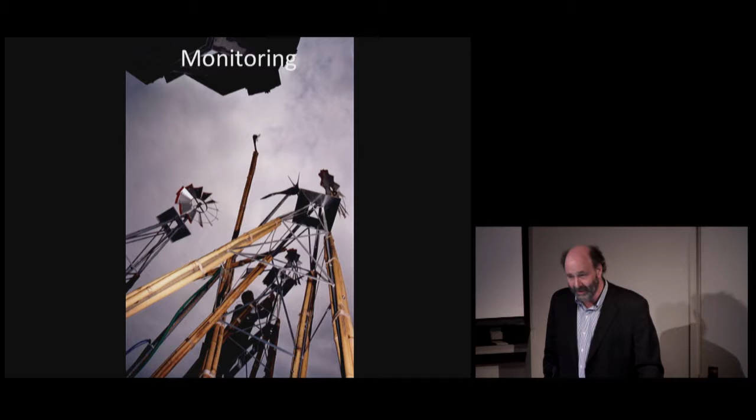So in those first 20 years, we were always fascinated by this series of complexities, whether it's high-tech, low-tech, technical innovation, and at the same time, yes, those are my dad's bamboo poles that I borrowed as we built this monitoring system in front of the Canadian Centre for Architecture about 15 years ago to try and somehow bring the outside inside and the inside outside. And we work in this integrated process on a constant basis, and many of the people around the table are not architects, and that makes our work really rich.

Our social activist roots really come from the community. There's a lot of women, semi-retired, semi-working, who donated a hell of a lot of time during some of the most critical moments of the history of Benny Farm 20 years ago. And they really taught us how to be activists and how to be effective in our activist activities. The government was going to destroy a real strong, rich community because a bunch of bean counters had an idea that demolition and reconstruction was fine and economically better.

So it was a 20-year battle, which is not tonight's lecture, but it's in the book, and you'll be able to download a copy of the book off the internet. I'll show you the website in a second, so anybody can read about this story. The story deals with everything from the embodied energy, the human scale, how to renovate, add, the importance of common spaces, and how to slide them into projects even when they don't exist in our budgets.

Trying to find a way to bring a whole wide eclectic variety of clients together, from single mothers who are still teenagers and going back to school, and they should be in the heart of these communities and not in some segregated parts of the city. And how can this density also really hold on to the values of green spaces within the city? How can we look at embodied energy as an opportunity? It's rare that we get to do wood flooring in affordable housing, and this is one of the techniques on how to get that done.

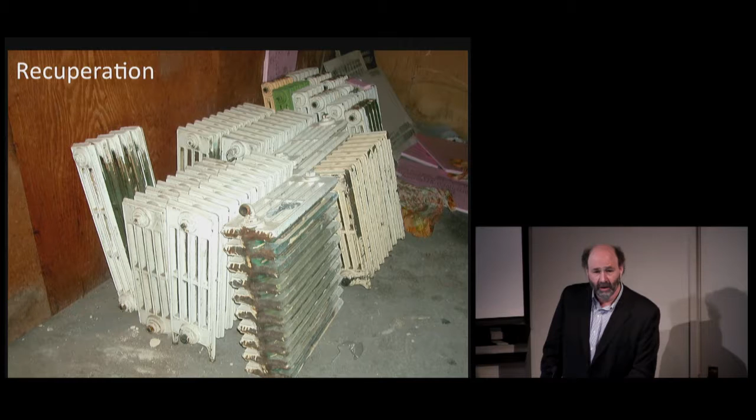We work with a wonderful array of people, so this is part of Claude Cormier's design at Benny Farm and our building in the background. And just a very interesting way of finding a happy medium. We can never really easily afford hot water radiant heating systems in affordable housing, but if you recuperate them and reuse them, all of a sudden they can become affordable. And shared space is really at the heart of many of these projects, especially right on the street, to activate them, giving a quality of life to seniors in this particular project at Benny Farm.

There's environmental quality. We're very interested in one of the best geothermal approaches, but at the same time, there were many lessons learned at Benny Farm. In some ways, Benny Farm possibly was too advanced for some of the affordable housing organizations to handle the maintenance

and operations. And I think that our second major project started about 5 years after Benny Farm, mostly designed at least, so this is around 2005. Another wonderful site, an old industrial warehouse yard site that the city used to own. And apologies for a couple of the slides not working.

What changed here is, instead of bringing the project right to the forefront and being as green as possible on day one, Benny Farm was designed to be about 50 to 60% greener than the average code housing project, which social or affordable housing wasn't even meeting at that time. And here we decided to only go to 35, 40% better than energy code, but allow the project to grow over time. And that was absolutely critical.

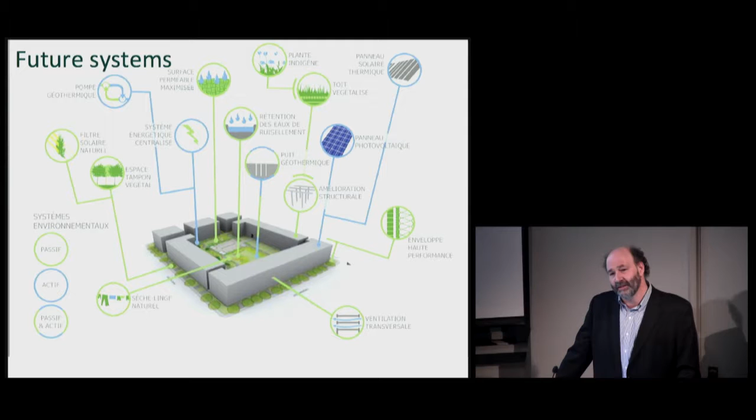Well, not totally. If you live on the top unit, you're at about 80% better than energy code. If you live on the ground floor, you're at about 10 or 15% better than energy code. So it's not perfect yet, and it's not totally even, and we're still trying to figure out how to modify that. But there are some technologies that worked and never have a problem, including clotheslines.

And the geothermal system in general has been very robust, and it's been robust because we've had backup systems that allow us to do maintenance without actually shutting down our main supply. And possibly the most important part of the project at Rosemont was there was a 3 to 4 year learning period with the client on picking which systems to use. And they basically were at the heart of the vision of the project and not us, which was more the case at Benny Farm.

Landscape is never in these budgets, but working with NIP Paysage, they found a way to include some components. And the materials themselves are still very modest, but there is a way that they can be passive and beautiful and relatively simple. Yes, some of the wood now is grayed, and some people are okay with that. Others said it was so beautiful, this torrefied wood, before it started graying. And so there's this constant education of the client.

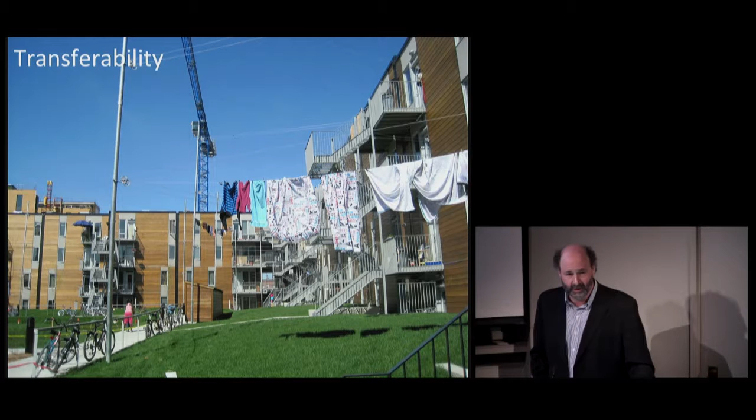I go back now once a year and give a lecture for those people who were not around 6 or 7 years ago when we were first designing, to better understand, and also to transfer, because now they're at a point where they're starting to ameliorate the building and add in some of those future components. And so those aesthetic and ethical standards, it's quite amazing to see the client appropriate the project.

One of my biggest frustrations, and I must admit I'm a founding board member of the Canada Green Building Council and have been part of LEED one way or another, is we're not interested in seeing incremental change because in a certain sense there's no time for that. And how does that incremental change turn into quantum change? And it won't be because of technologies, because A, we can't afford it right now, and B, it's not really a good solution around the world. So we're going to have to find a larger transformational approach.

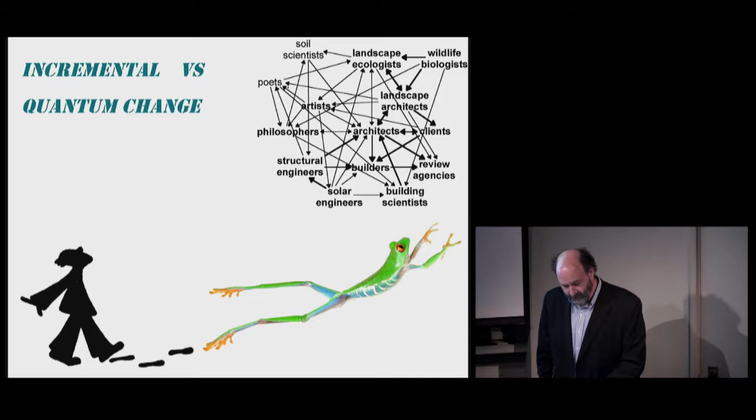But I think one of the hard parts for architects and designers is most people don't really even want to understand how and why their projects are not working. We all want to know why they're working. So I spent a lot of time in the last 5 years doing monitoring plans and post-occupancy evaluations with external experts to try and learn from our projects. And these lessons learned have been at the heart of our latest work, which I'm going to be showing tonight.

So yes, we want to see growth over time, but we want to have the modesty to recognize that there's enough robustness and resilience that if some of those techniques are not perfect, there are other ways of going forward. And I think that we need to have some of that modesty as we move forward.

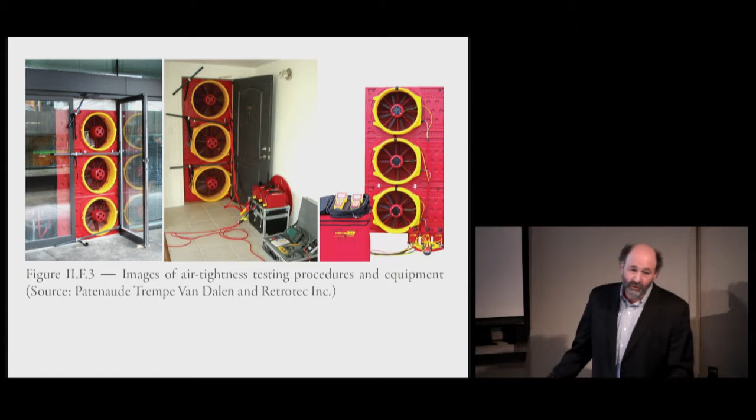And that's at the heart of the lecture tonight for the first project, this new affordable housing project in Laval, Quebec, just to the north of Montreal. In Quebec, there's the Agence d'efficacité énergétique, our energy efficiency agency, and they can't do a blower door test beyond the triplex. And the social housing programs and affordable housing programs don't allow you enough money to actually hire larger professional teams. So I actually had to turn it into a pilot project to bring in the people who actually do blower door testing for 6 to 12-story buildings and call it something new.

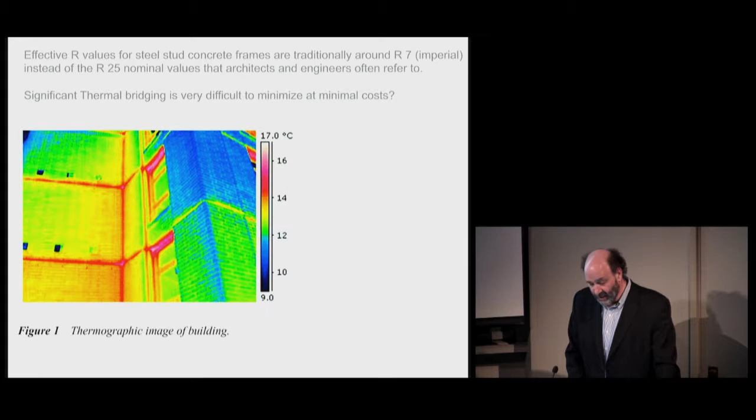We've seen many of these photos before, and yes, they're energy losses, but I think really it's when we make them so airtight that they actually can become very dangerous. And architects' lawsuits coming up in the next 10 to 20 years will be related to this subject. So architecturally, the building and the form was almost predetermined for us by the technical resource group.

And what we convinced the government to allow us to do is on the Y pavilion, which is all seniors, to really go as far as we can towards passive house. On the X, which is for families, about 6, 7 stories, we go further than normal, but we take very, very specific measures to not take any chance with our dew point. And then the Z is for seniors as well, and relatively similar to X, but maybe with a bit more caution and resilience. So within the same building, we tried to set up 3 specifications.

And what's fascinating, because at the same time that I asked for a special 6 or 7% budget, which is half that of some of our previous projects, more than the regular affordable housing project, is I've gotten in place enough money to monitor 12 of the units, where 2, 2, and 2 will be in different locations at the beginning, and another 12. There'll be almost 24 possible total units, but 12 pushed very far, in which maybe there's 6 in the Y and 6 in the X and the Z.

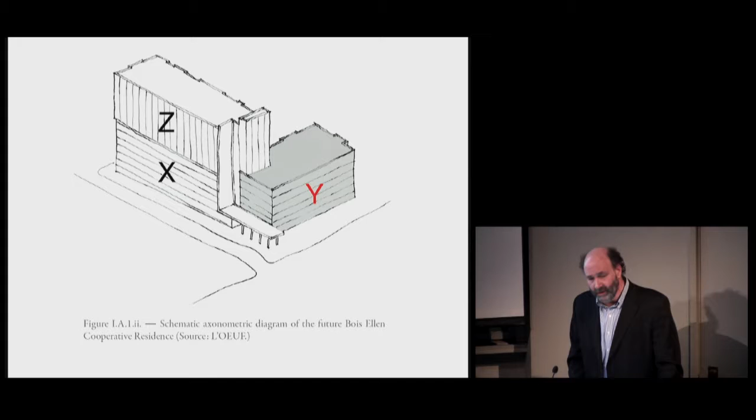And this will allow us, and you'll see what these measurements mean. It's really putting thermal sensors in the wall, looking at humidity, temperature, and really trying to understand how we progressively move towards something and what kind of air tightness we have along the way. So at the same time, the design starts the charrette with passive solar principles. We have this southeast, southwest challenge and can't do anything about it. So this is our southwest facade.

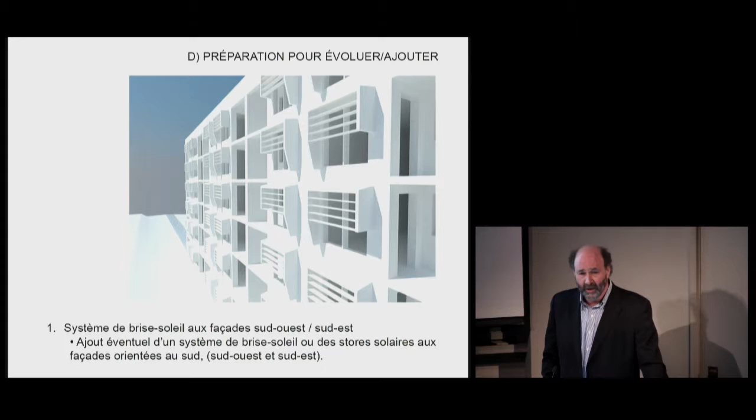And also in affordable housing, we really don't have the luxury of easily putting in mechanized sunblockers. So we're trying to figure out how we can deal with the very hard subject of overheating, because we don't have in Quebec any money for air conditioning, unlike Ontario, for our affordable housing projects. And at the same time, we have all this cold and we need all this solar gain. So there's very, very specific studies done very early on the angles and understanding the difference between southwest and south.

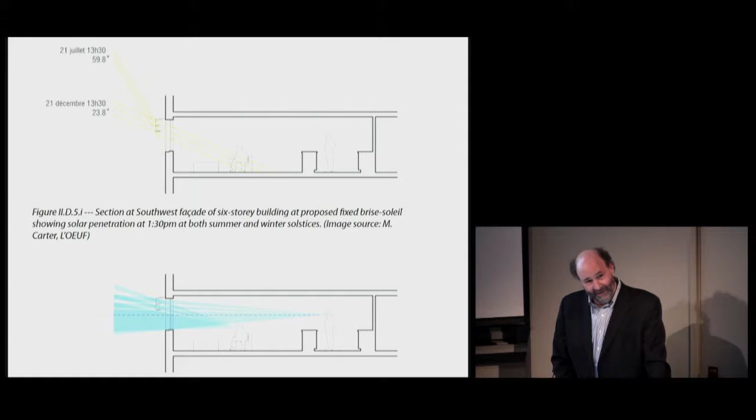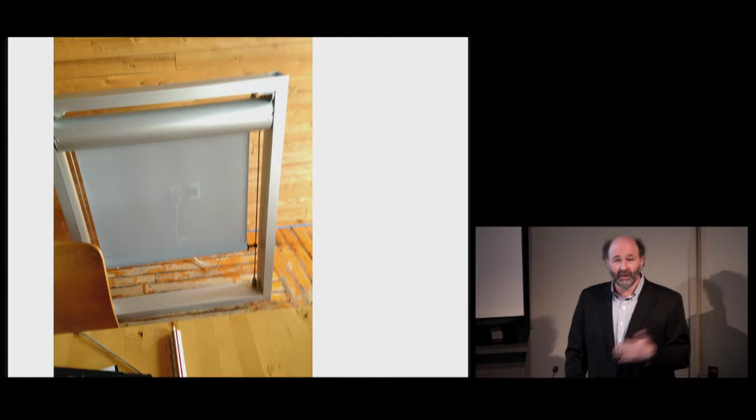And it's funny, after the contract came in on budget, thankfully, a company approached the general contractor to put in a mechanized external blind anyway. And we had to fight the client to say, listen, when you start adding in the maintenance operations over the next 25 years, and you put in the replacement costs, it's going to cost you more. And you're going to be looking through this without any clear views for a large part of the time on the southwest facade. And then you've got the ice issues we have in Quebec and Montreal in particular, and the wind problems. And in the end, the client backed down. But every single way along the way, we have these challenges.

This is one of the details that we drew up at L'OEUF for CMHC back in 2005. And it's a wonderful detail. I mean, basically it shows your foundation wall with continuous insulation. But when we tried to build this at Benny Farm, the contractor said, I'm not signing this. If you want 100% liability to hold up 3 stories of brick, even though our engineer said there's no problem, you better write us a special letter and take over.

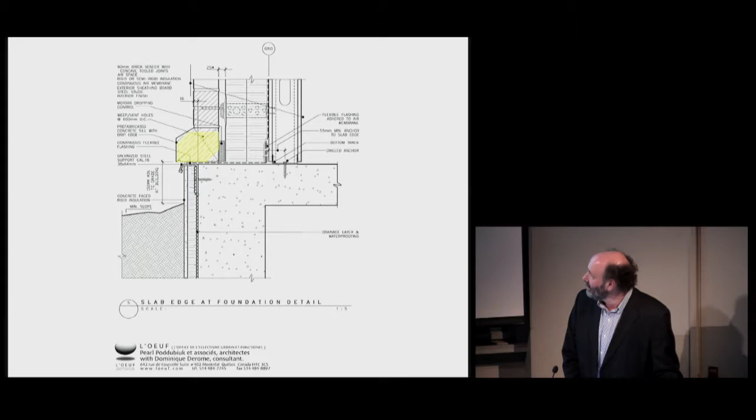And I don't know how many architects are comfortable about that when the contractor wants to back out. So we did look for this kind of funny precast block that has styrofoam and concrete mixed in, but they don't really perform that well. And so there's always this very nervous thermal bridging at the foundation detail.

And thankfully for this next project, we found a product, this foam glass, that can take the weight of brick and still be very affordable. And so really it's our rigor of finding these technologies that are not overly expensive and finding which ones are the right ones to try and incorporate.

So we all know about holding up brick. So we have brick only on about 25% of our facades because of the huge thermal bridging problems, and it costs us so much to try and address these issues. So we have a lot more metal siding than normal, but this is really important for the thermal comfort of the client.

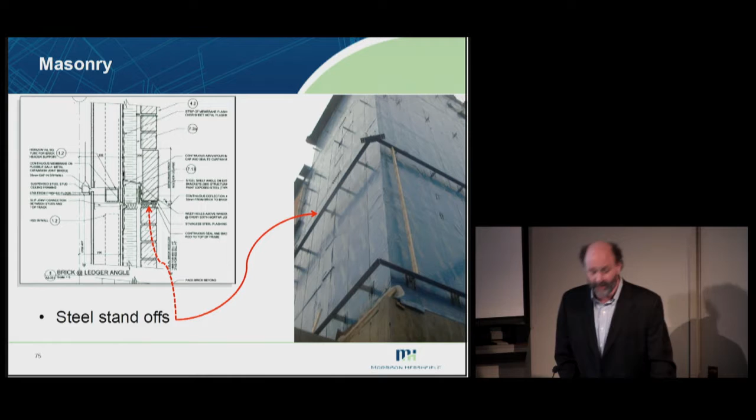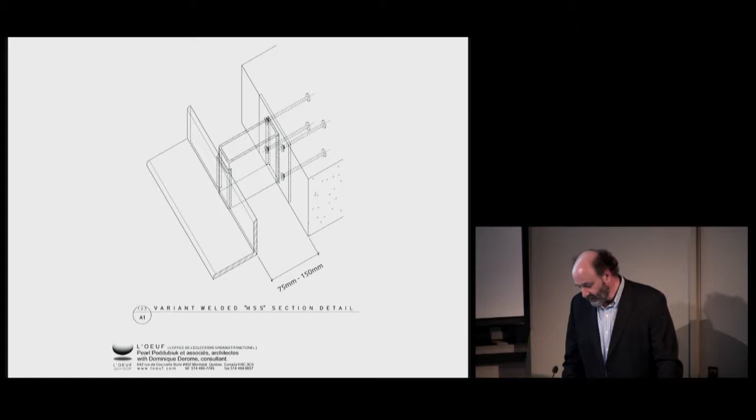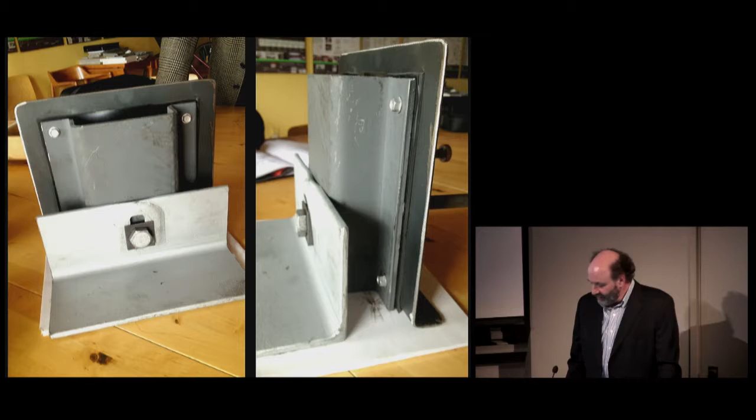Just an interesting person with a lot of experience, and you pour it all in one piece at the slab, and you can have all this adjustment, and then you put in this kind of material that, because we're not doing any welding, it's all about bolts. There's not a danger of fire as we try and address this break in the thermal bridging. We'll be testing it out to see how effective it is, but this is what we can afford on the project.

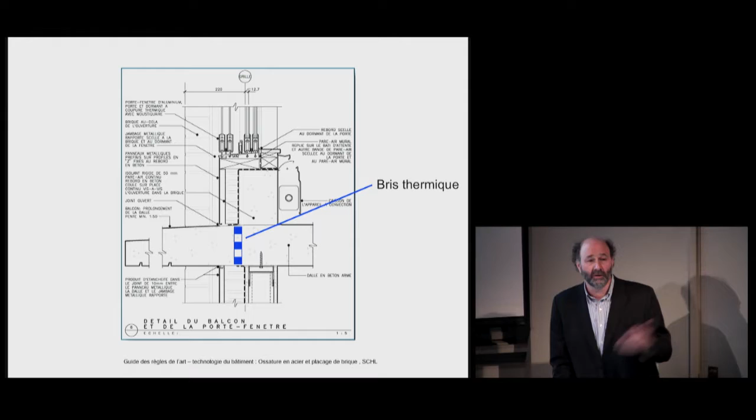Probably the biggest problem, and Ted has probably shown you enough photos of these radiators, where literally the balconies in concrete are one of the worst things possible. We all like to draw these nice thermal breaks, but in the end the steel goes right through, and that steel is very expensive and causes a lot of the thermal bridging.

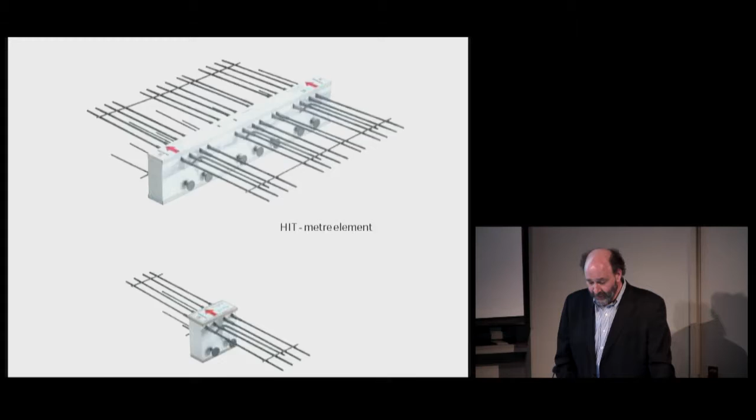There are the technologies of thermally broken concrete slab extensions, and we know them. They're from Europe, but we don't have $3,000 or $2,000 a unit to be able to do this. We tried a homegrown solution on Benny Farm, and it partially worked. We were lucky enough to have hot water radiant heating in the floor with the geothermal, but on this project we don't have that budget.

And so with the innovation of working with the engineers, we've come up with a new strategy, and that is to replace the stainless or the steel with fiberglass rods, almost an inch thick, that they use on highways. And then the engineer did some testing at McGill and found out that the elasticity and the fragility is actually a real problem, that it could actually snap; there's no creep in the fiberglass.

And so we designed in a kind of safety mechanism. You can see it a little here. It's basically like a stainless steel guy wire that would stop the snapping and give you a minute to move out of the way before it fully falls, assuming that you had an earthquake of some sort; it's not going to fall regularly.

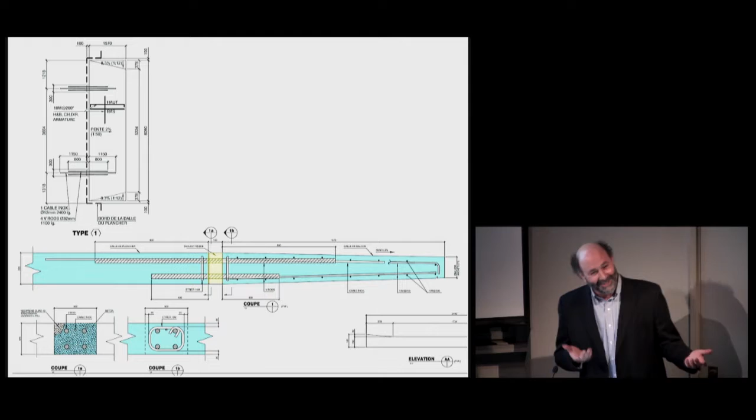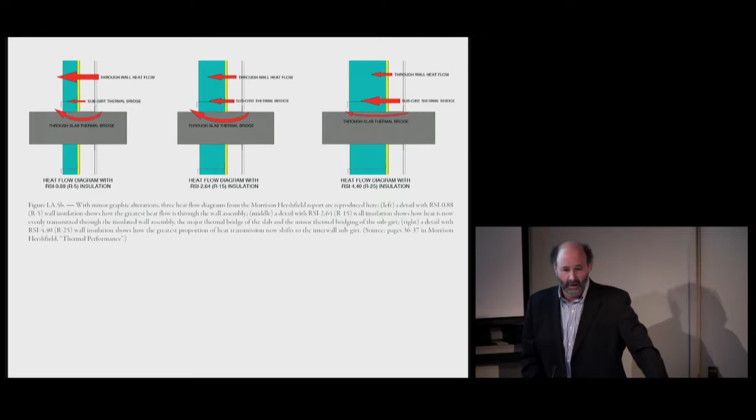The other interesting thing is studies going on across the country between RDH and Morrison Hershfield are showing that the thermal bridging effects on a project are getting 2 to 3 to 4 times more important as our buildings become more and more airtight. And adding more insulation is somewhat useless if it's not being properly added.

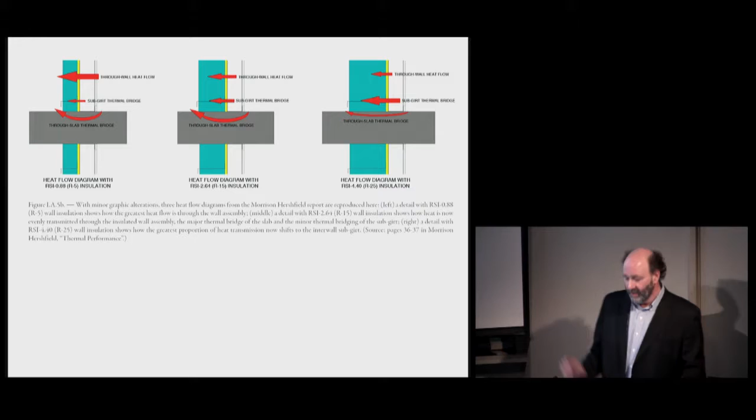And this has led to us not going to full Passive House standards on the insulation on a steel stud concrete building. We did a study with Curt Hepting, a wonderful engineer, Enersys out of Vancouver, BC. And in the end, after doing all the simulation, we've added 5 inches of mineral rock wool outside of the air barrier, so there's zero risk of your dew point in the wrong location.

Then we found the technology, very simple, using fiberglass to suspend that mineral rock wool in the wall, and also then have the attachment for the brick ties without having the thermal bridging going right through.

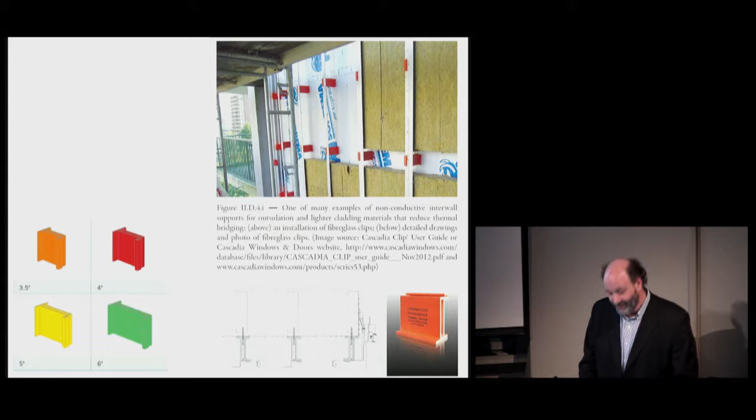Now, we were nervous that this was going to be over budget, and to our surprise, so far, it came in on budget. We'll have to see. It's under construction, the project. And we even included in this affordable social housing triple glazed windows towards Passive House standards for windows.

But we picked our locations, mostly on the northeast and northwest. And on the southwest, we have good quality double glazed windows, which could take advantage of the solar gain, and still the air tightness and the proper installation of the window in the right location. So with steel studs, you often have your window in the wrong location on the stud.

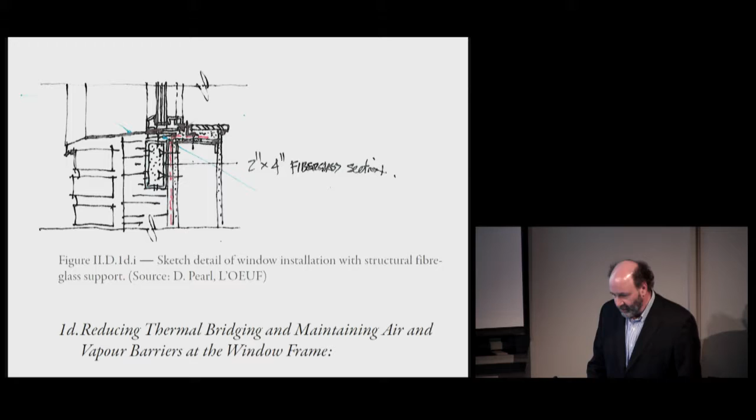And here we found this kind of fiberglass section that we actually connect to the side of the stud to try and place the window closer to align with the insulation so that we have less of a thermal bridging problem. Again, we'll have to see how our industry responds to this, since it's not typically part of what they do.

One of the hardest things really was working on the mechanical systems. The lessons learned at Benny Farm and Rosemont is sometimes we can have the best systems, but when the costs are centralized, because we have these massive HRVs that are centralized, people on the upper floor, when they get a bit hot, instead of trying to help solve the problem, they open a window.

And when they open a window, 2 things happen. A, we lose the energy, and then B, they imbalance the kind of pull of the neutral pressure plane and make the lower units colder. And so we decided that there'll be a central preconditioning of the fresh air using a solar wall, which is a very low technology of just sun hitting a black surface and preconditioning.

And so we preconditioned the air essentially from -20 to -5. And then we circulate the -5 air in the building to all the units. And each unit has a regular HRV, like your typical. The typical HRVs work very well at -5. They don't work very well at -25. And they don't require much maintenance.

And so the bill for paying that heating from -5 to +20 is going to be for each individual unit. So they're going to be encouraged not to waste energy. And that's the key. And then secondly, on the upper stories, the top 4 floors of both buildings, we put little kind of alarm contacts in all the windows.

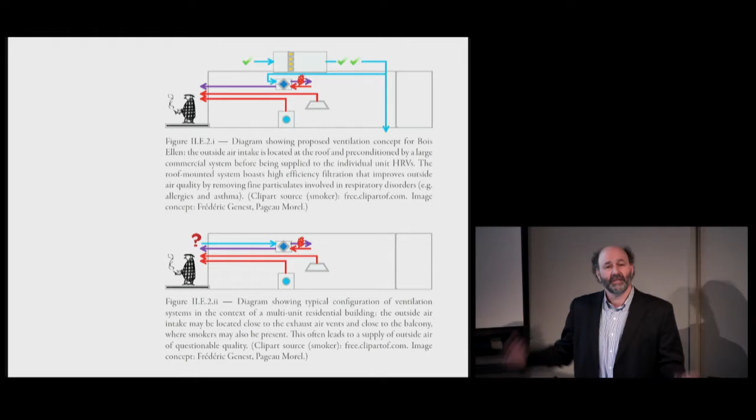And we can figure out how many at the beginning are opening windows, and then just through education and being careful to your colleagues living in the same building, possibly change the way things work, which is really the way old buildings used to work before we started to mechanize everything.

So interestingly enough, we expect to get to about 40% better than energy code once again without any geothermal. And it may take 20 years to recuperate your money, but these projects we expect to build over 50 to 100 years. And then the other problem I have with this payback is it's always based on operational costs.

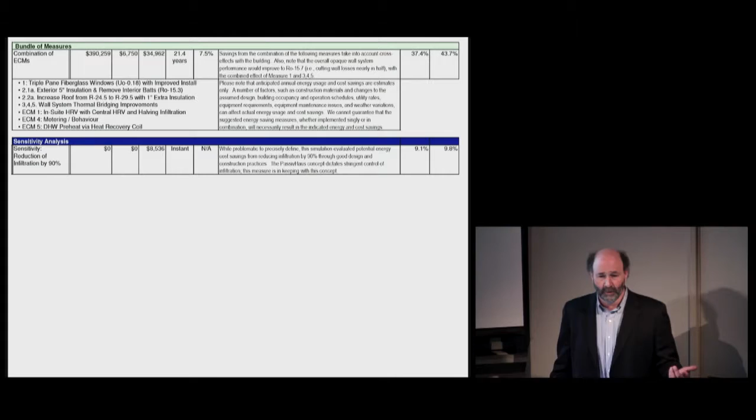This design is designed to be durable with no mold and no problems of where your dew point is over time. And that's something that's never put into those pro formas. And that's something that I consider as a problem and why we're not building properly today.

But we also looked at values for the client. We put up energy efficiency, but we put up comfort, durability, and resilience. And we looked at every one of the items that were possible to add. And it wasn't a kind of cost engineering. It was about client input on what's important to them within the risk management of the overall envelope.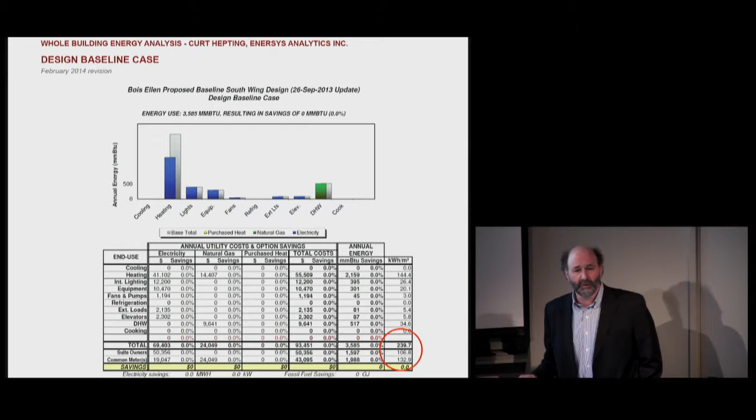So I don't know how well everybody knows the whole jargon with kilowatt hours per meter squared, but in Quebec, in Montreal or Laval, where it's pretty cold, a regular affordable housing product uses about 240 kilowatt hours per meter squared per year. And our design will get that down to about 134.

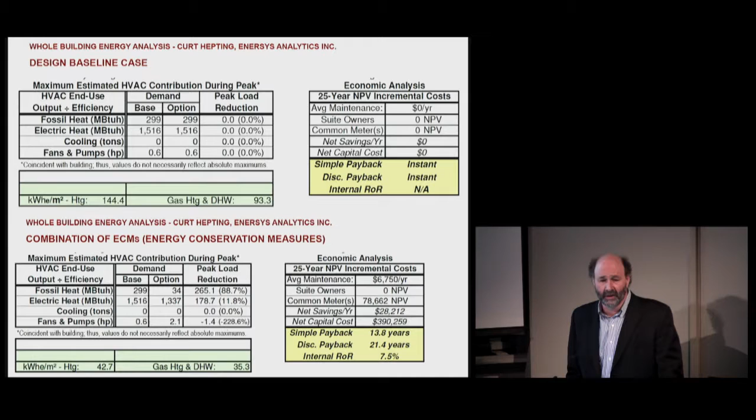So it's actually quite a significant drop, even more than the energy savings per se. And we expect to do this with, again, as I said, about 6 or 7% additional funding over our regular affordable housing projects.

And what's critical, within this money, because of the scale of the project, we put aside $100,000 during construction to really care about the building process. So about $30,000 to $40,000 is to hire a commissioning agent on the general contractor's team, so that he can't say he doesn't understand this technology, that he has an expert working for him to help him pre-plan everything, and everybody had the same cost when they were bidding.

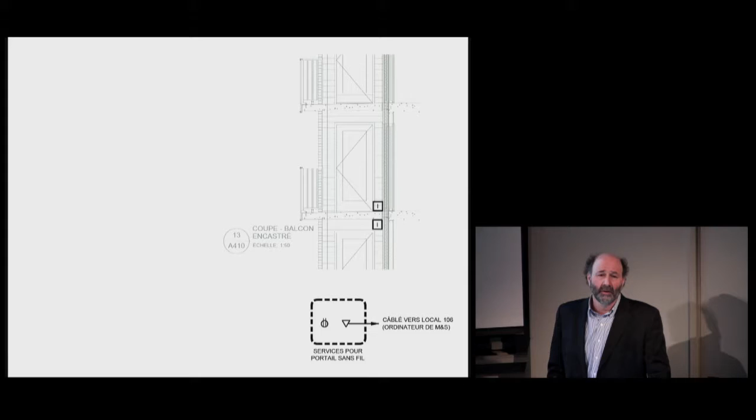Then we have about $60,000 of air testing, of thermal bridging testing, of water tightness testing, going out throughout the entire year to guarantee that we move towards 0.9 air changes per hour. Our regular affordable housing projects have trouble hitting 2 air changes. So we're talking about more than 100% better in response. Passivhaus standard goes down to 0.6, which we didn't think was possible given the affordable housing budgets.

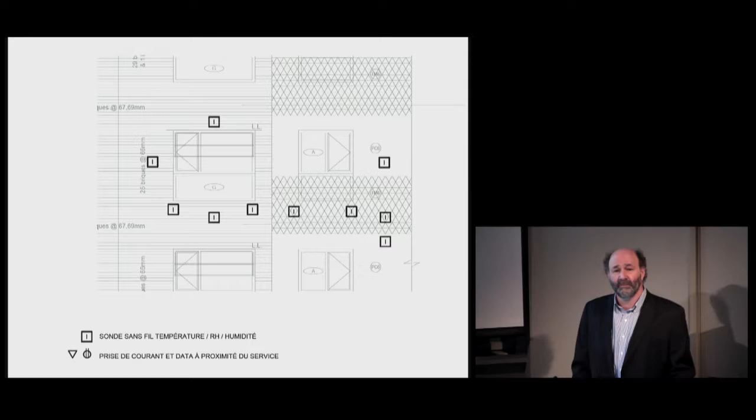But then we put in these sensors all over the wall, inside the unit, in order to learn as much as we can of how many of these thermal break techniques are actually going to work, and how can we actually make sure that there's no problems in this approach that we still consider a form of testing. And then we'll be looking at air quality and daylighting and surveys, exactly as we're completing now at Rosemont. It's a really big team. I love organizing it, but this is certainly not a 1 or 2 person effort.

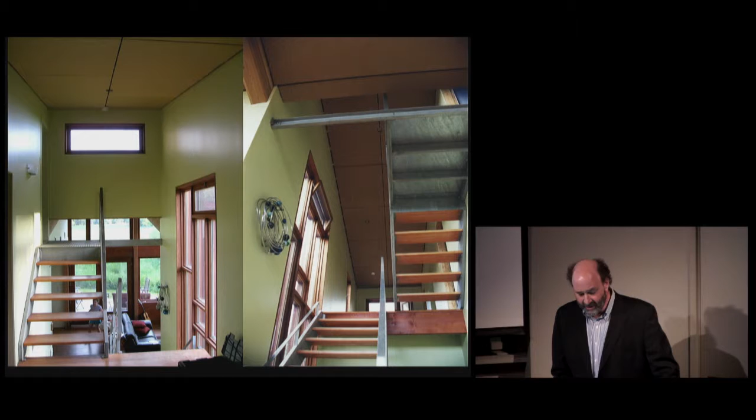Again, very interesting, nowhere near passive house standards, and a lot of passive solar energy, and just a simple palette of materials, and some quirky details on making sure that we don't clog up our drains when we got this combination of compost and straw bales. I actually like this part of the straw bale roof: it's actually designed to compost slowly over time. And these lessons were important.

But this next project we would try, after sporadically designing and building primary and secondary homes over the 20 years on and off, L'OEUF stepped back in 2010 and reconsidered its strategy for such projects. We tried to prioritize the following: local building culture and immediate context, passive house design with some active client participation, and promotion of high-quality local products when they are proven enough, or import some to demonstrate why such products should be built locally. Again, we did not want to expose our client to being a guinea pig on something that wasn't yet built here at the scale that it needs to be built.

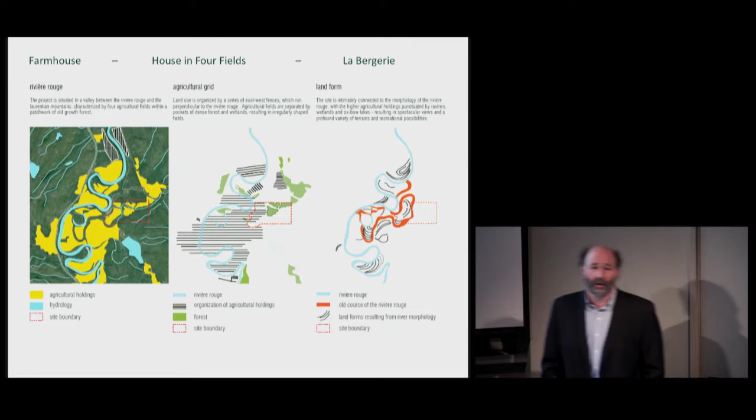So the site is about 2 hours north of Montreal, so it's relatively cold, beautiful farmlands, and really the client wanted to build a farm, really a functioning farm. So horse, cows, chickens, organic vegetable garden, and a secondary home in which the children and the next generation would learn about those values.

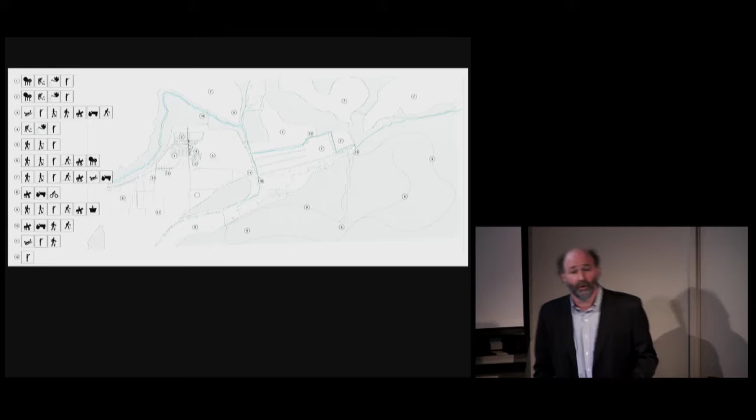And so with Nip Paysage again, this is the site. We looked at some of the history, the movement of the water. These are the wonderful fences that separate the different lines of where the cows graze. And wonderful view of Mont Tremblant in the background. And it's great. They all follow perfect east-west, north-south within 10 degrees. So with NIP, we put together a program for this whole working farm. And it's a really wonderful program. And it's cool that it has activated components in different parts of the year.

And if I had more time, I'd go into all the details, but I don't want to keep you here till 9. And these beautiful Highland cows were there actually while we're building the house. So we always had pleasant site visits. And that's one of the cow sheds that was built, designed by us. Simon, from our office, worked specifically on that one. And it's just about how these utilitarian buildings, just like the main house, should come out of the local vocabulary of barns and working farms.

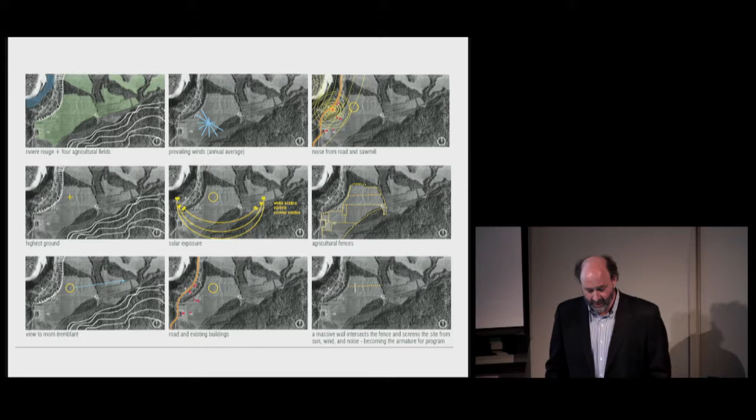You can just see how wonderful they are all year round. And so the site really, in the winter and the summer, it's quite pristine. There was no leveling of the site. We worked with its natural topography. And we studied all the components, from the winds to the noises locally to the solar orientation, the existing grazing.

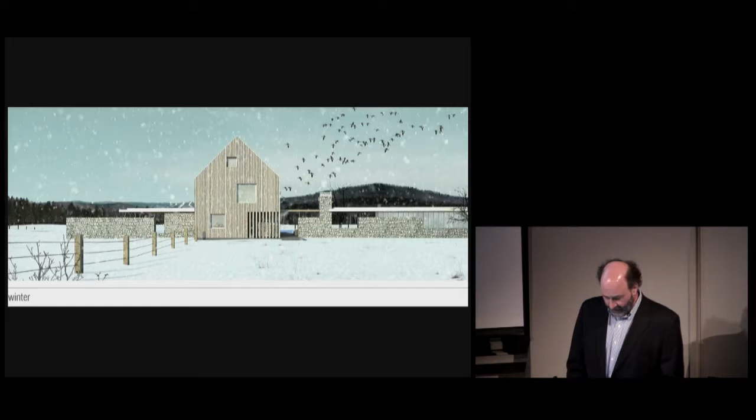And we were inspired by many of the barn forms that we found in the neighborhood. And of course, we wanted to bring a modernist effect to it. And I think that really the design is based on this really interesting east-west axis, which is right on the fence line that you saw in the perspective, and the north-south axis as well. So you end up with these two axes.

Sorry, this is the north up. So this is the north-south, and that's the east-west, and that's a total solar exposure over here. And you can see that over here. And so the western part protecting this courtyard is protecting against the west and the southwest winds, which are very strong. And it doesn't stay hot for too long. You have maybe a month and a half of hot weather, and then it's pretty cold most of the year.

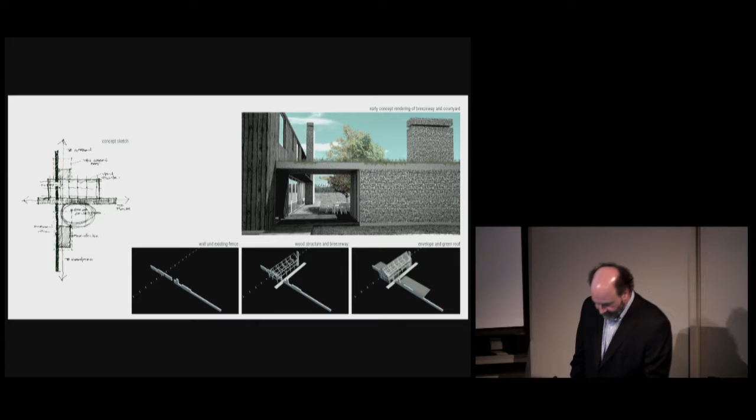So this external kitchen and greenhouse actually end up wonderfully protecting this external exposure of the beautiful south orientation of the farmhouse. And then we have to the north of the site all the vegetable gardens and this wonderful orchard that's still young and going through growing pains as we approach the site and come through the orchard, coming down to this axis. And down the axis, you'll see some photos.

You actually see Mont Tremblant to the east, and the house and the entrance is really at the cross of these axes and then moves into the center. Here's where we have the vegetable pavilion to work on all the produce, and another kind of shed; now they're actually together. When this plan was done, they were separate. And we have the cow shed down here, and the chicken coop actually near the front of the property.

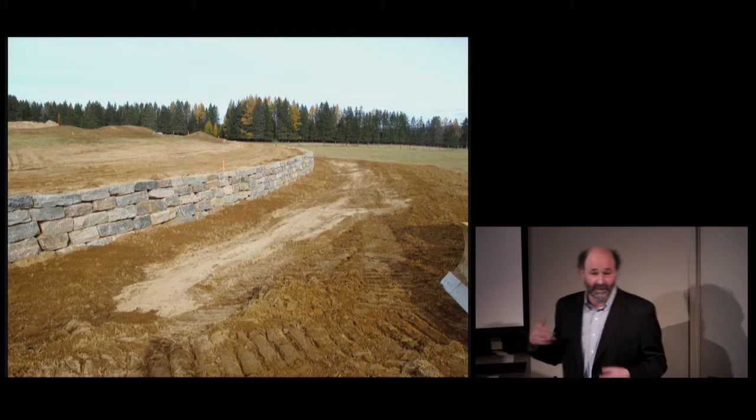Working with Nip Paysage, one of the techniques that was interesting, the only kind of gesture in the landscape, was this beautiful ha-ha wall to stop the cows from maybe charging the client's more private domain. And so it's a simple wall that's well located, that really followed the natural terrain. And you don't see it from the house, actually, because you have to go around the back. So it's actually quite beautiful when you do go around the back.

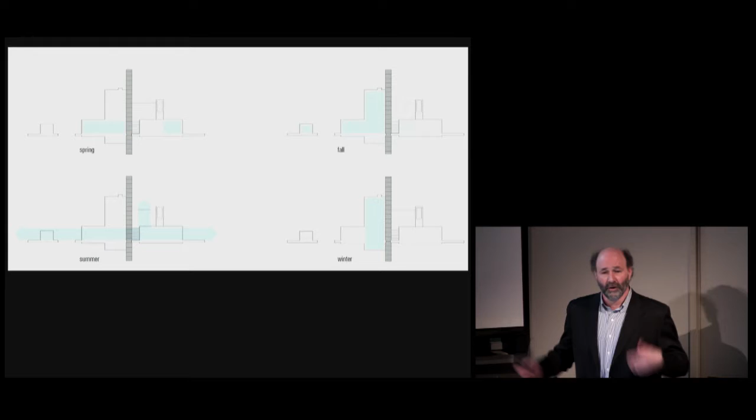And the house really is designed to expand and use different spaces throughout the year. The greenhouse starts the production for the outside. We're actually using Professor Mark Lefsrud's technologies in LED lighting in order to perfect the preparation of the germination phase. So the experimental component is being used all around. The produce actually got finished ahead of the house, which is one of the great things of everything working at the same time.

And the wall section, for those who've seen this or not, published in Canadian Architect, one of the cool things about it is if you actually look at the solar gains and losses, the facade itself, the envelope, actually produces more energy than it needs during the year. It's really the need for fresh air from the heat recovery ventilator that makes the house meet the 15 kilowatt hours per square meter. So to keep this in mind, the social housing, affordable housing, when it starts normally at 240 if you're in regular housing, we got it down to about 130, and this is at 15.

So, you know, obviously it's not the same budget, and it's not the same goals, but I think the principles of what we're learning and passing from one to the other is really where the fun is. And really, this was a project where we were able to eliminate almost 100% of the thermal bridging.

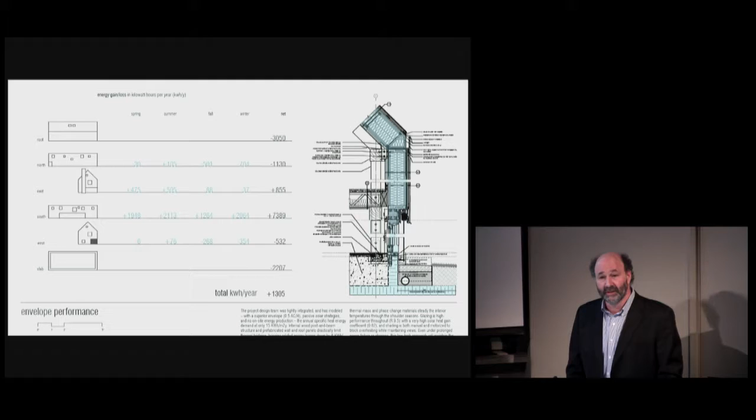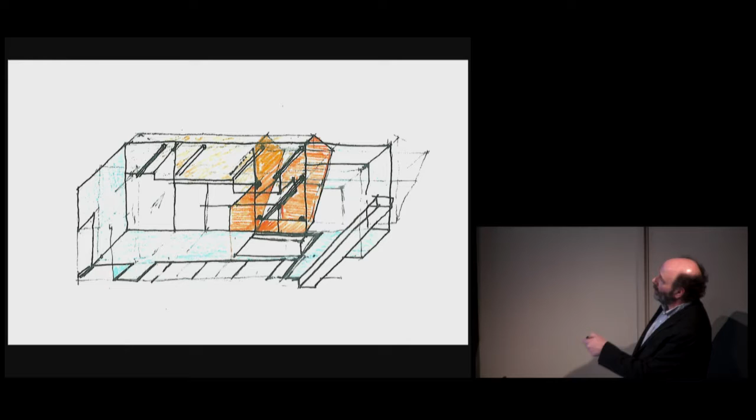actually helps brace the house, because we have these beautiful views at the entrance and out to Tremblant on the two gables, where we can actually totally solidify the house. That makes it a little bit different than a barn. So you can sense those gables and the highly glazed south elevation and relatively quiet north elevation over here.

What we really like is the palette of materials is restrained because the lighting and the nature is so amazing. We wanted to give a chance for the flowers and the vegetables and the animals to provide a lot of the color and the atmosphere. I mean, it's just a beautiful place to go up and visit.

And one of the great things about using 150-year-old siding is you don't need to treat it. It's just naturally treated through time. And so you get this old barn look on day one. The stone is local quarried stone. We have a combination of limestone and St. Mark stone.

And all of the post and beam that you'll see in a moment are all reused, rehabilitated, and recuperated wood from all the local farms in the southeast of Quebec. Sometimes he goes down to Vermont or Ontario to get some of his supply. And again, very simple, beautiful wall into the landscape on the north-south axis. So the plan is very, very simple. The sections and elevations are actually some of the most beautiful components.

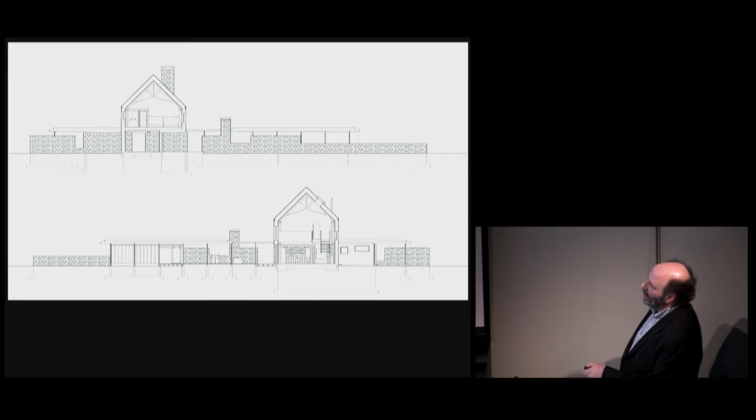On the upper floor, we have a kind of a den for 4 children sharing one large bedroom, or a bridge going to the master bedroom. Kitchen, dining, living in the main space. Outdoor kitchen with its fireplace, and greenhouse over here to work on the germination and flowers throughout the year. You can see in more detail here.

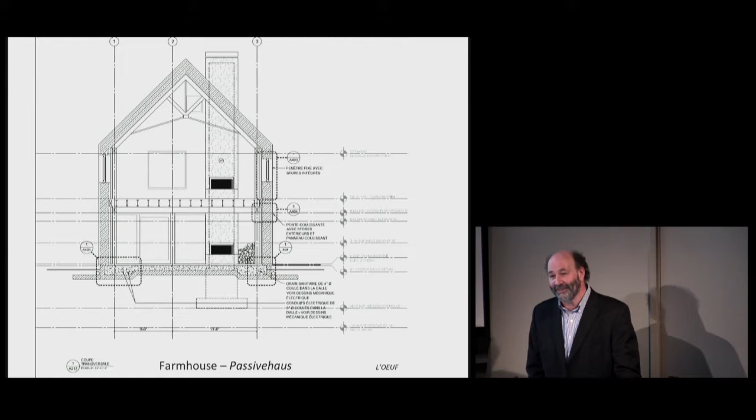Almost no basement anywhere. We only have a mechanical services area and some vegetable storage below. And you can start to see how thick the walls are and all the detailing that comes along. The stacked fireplaces use very high efficiency German stove technology, so they don't use any energy from the house. But we're finding out that the house, when it's minus 25, is still plus 25. And we're trying to figure out how to stop it from overheating in the middle of winter. It's such a Ferrari in a sense.

And all that we have in the house for heating is hot water in the ground floor where we have our St. Mark stone. And the engineer didn't want to take a chance, and he put hot water in the wood stud with a little bit of concrete topping. But we're finding out that we need to turn it off for most of the winter, that the house is just too effective.

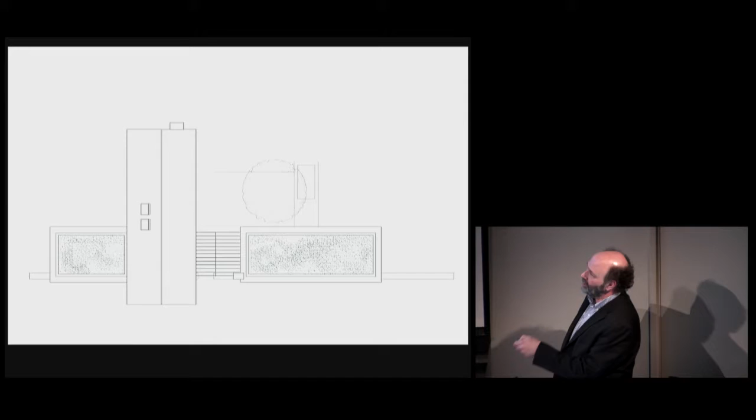We have these beautiful green roofs over the greenhouse and the kitchen and over the entry pavilion, because there's a little external carport. And these are beautiful views you get from the upper floor and the staircase looking at green roofs within the landscape.

So on the ground floor, as you come in and you go down the central axis, it's framed by this beautiful view of Mont Tremblant to the east, the southern exposure to the landscape and the courtyard, and relatively well protected to the north, with the day-to-day main entrance coming from the north, with the pantry and the kitchen right at the heart of the house, where you get to see everything. There's an external shower, there's a hot tub,

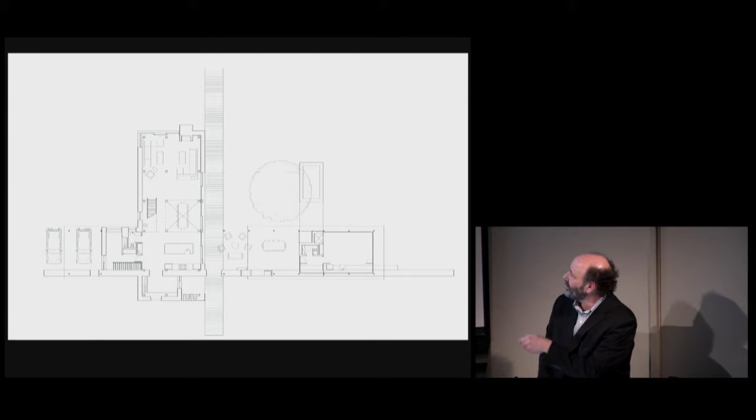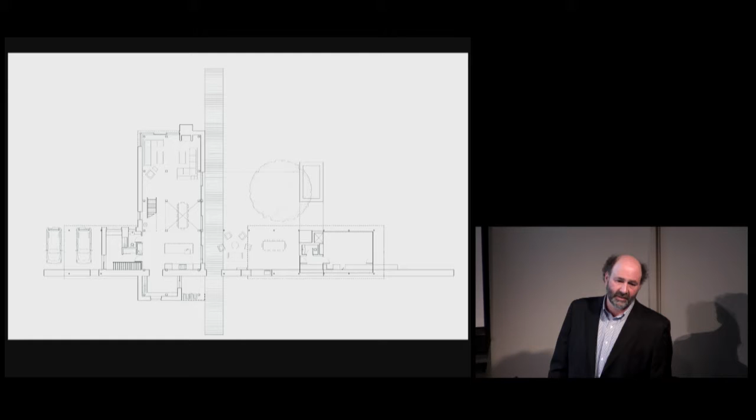The construction process was a lot of fun, certainly a learning experience. It was fun to go out with our structural engineer and evaluate the wood before we started designing the house to see how we can span the house. We took the client along, and he said, oh yeah, I want that one, I want this one. And I think that's needed when you need their support at the more difficult moments later on in a project.

And even checking out the siding material before you start designing the external facade. And then this amazing technology now, we have this insulation where you could basically build a slab on grade on top of 8 inches of solid insulation, and it's not moving. Even this winter was our coldest winter. There was a problem with one of the doors a couple of weeks ago, and I got a call from the general contractor saying, your house is moving.

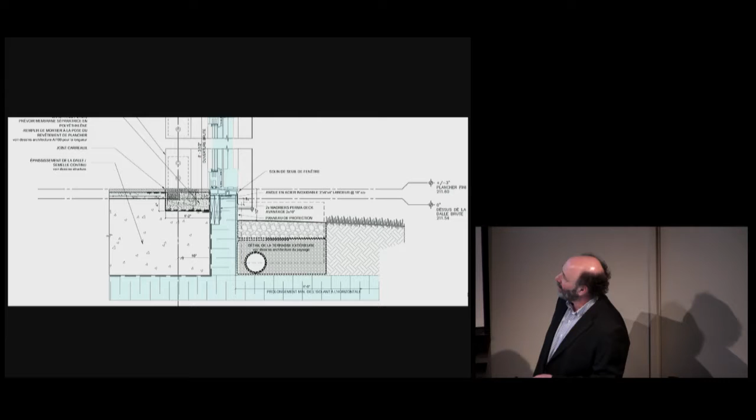I told you. And of course we go up there and the house is not moving. There's a weather stripping problem on the door. No, these details are really well thought through. Simon worked a lot on them. It's a lot of effort gone into how to get it done.

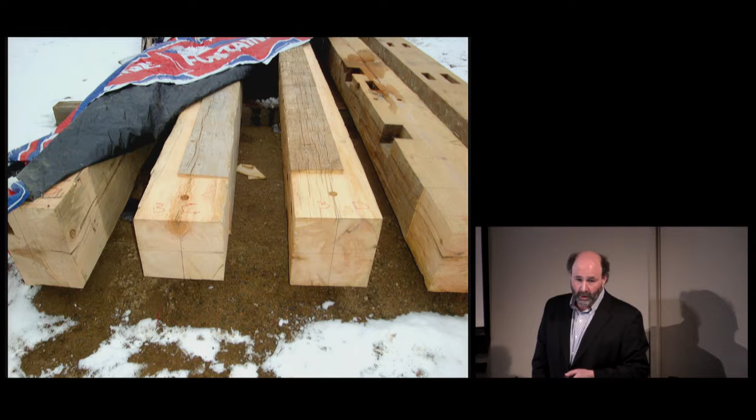And even the whole post and beam, like most people don't want to see these kind of pieces in this modernist aesthetic. So you have this interesting mixture of steel and wood, 150-year-old columns that have holes all over the place that deal with all the moment connections, and then the whole technology of eliminating the thermal bridging. It's actually quite an exciting thing watching the structure go up. The treated wood, as much as we need to treat them, not all the sides are going to be exposed.

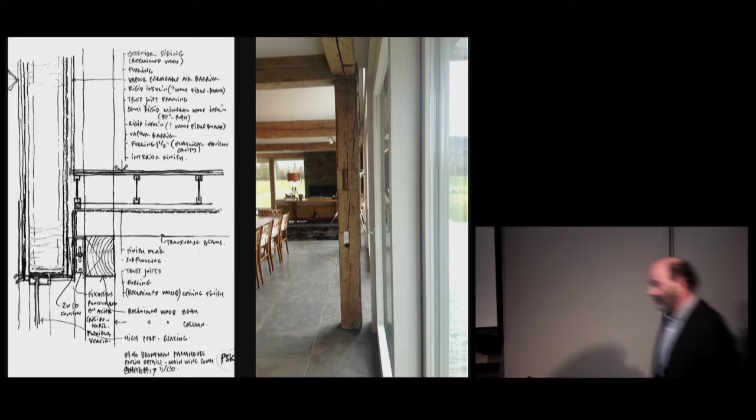And then very early on, Simon and I, in the detailing of the wall section, we wanted the post and beam to be disconnected from the house, because gyprock and paint and whatever other finishes don't move the same way wood does. And so we brace the structure hidden in a certain sense, and there's some movement allowed, because the external walls are these huge prefabricated panels.

And so we can also then hide in blinds if any are needed at any point within the house, and separate the two. And I always felt from Auguste Perret, the idea of separating the column gives you a much nicer feeling in the room than when it's buried within the walls. And it feels more like a barn.

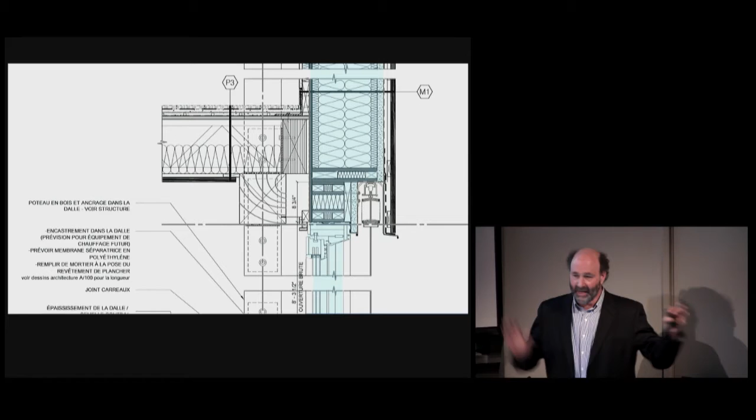We integrated the external shading to not have the overheating, and they're programmable, but I have a client here who has the money to repair it, which I don't have on our affordable housing project, if it does have a problem. It's all actually quite cool the way it's programmed. You can program it by facade and then follow the sun and adjust the angles.

But if you don't want to use it, that's why we put in extra backup air conditioning using the HRV distribution. But the house is designed so that you don't need any air conditioning if you were to use the blinds properly throughout the summer.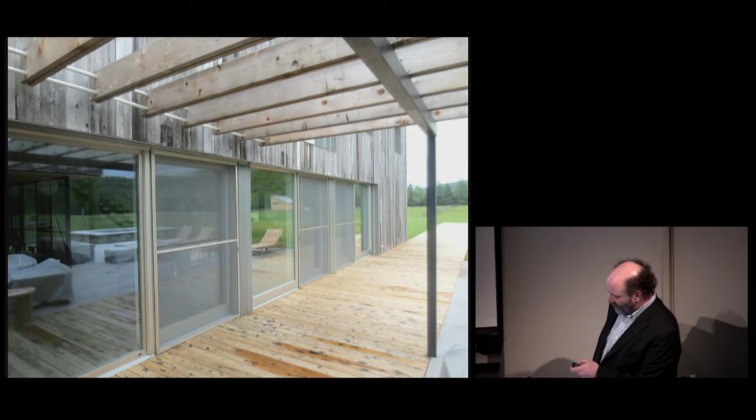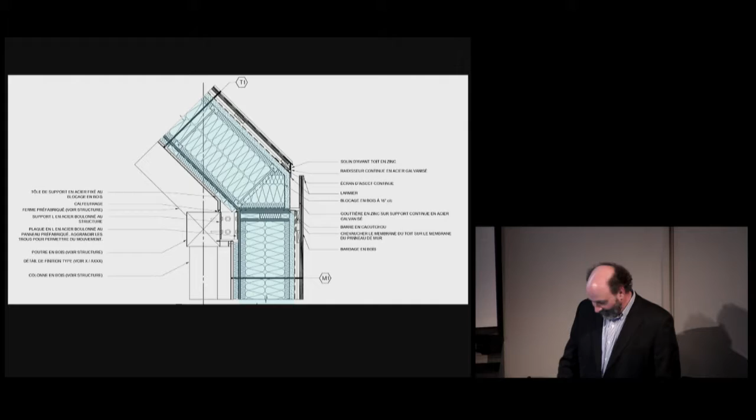You have this wonderful limestone continuing, and the wood. We actually don't connect the wood, so that the two structures, one's steel, one's wood, come close to each other, but they don't actually touch each other. And then we have this wonderful gutter detail that everybody always asks about, how we get that done. Not a very obvious thing to get built, but it does look beautiful. But you do need to have, we have put in our suspenders, we have an electric cable in case there is a problem, nonetheless.

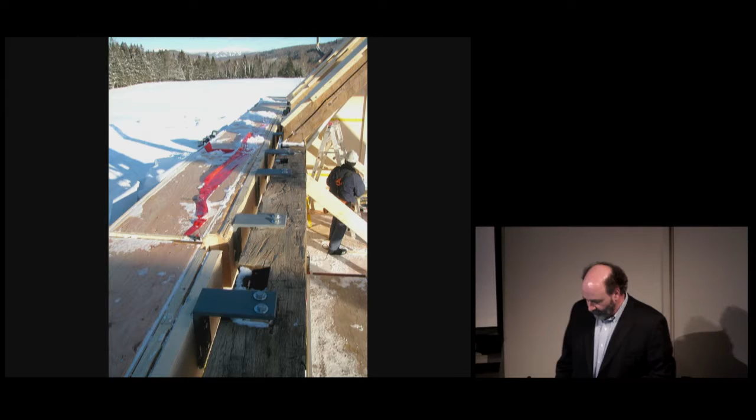So the construction really requires a good team to understand how to build with such old wood, the whole temporary bracing of the structure along the way. And then these huge prefabricated panels that are then bolted onto the post and beam, but with a certain distance. And because this is the warm side of that panel, there's no thermal bridging there. We're able to inspect it all. And then the beautiful kind of light steel mixed in with the old wood structure that Jean-Marc Velle designed.

I thought at this point I'd just take a second to tell you really about the challenges. You know, there's additional consulting costs. There's a challenge with the construction industry. There's modeling and simulation that's so hard to do on Passivhaus. Estimating costs, need for specialized monitoring and testing equipment. But there's some advantages too.

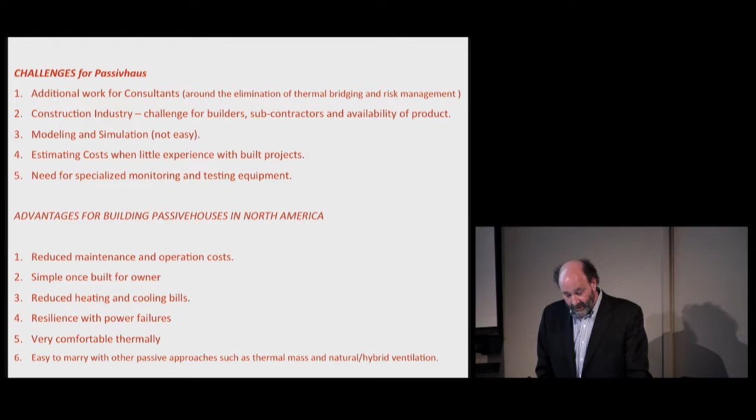We think it's reduced maintenance and operation costs, simple once built, reduced heating and cooling, resilience with power failures, very comfortable thermally, and easy to marry with other passive approaches like thermal mass and natural hybrid ventilation.

So this is kind of showing you, the client let us put in 50 thermal sensors throughout the entire house in the walls. So these are well located, usually under doors or windows. That's the panel delivered with the sensor already in place. And then we actually have a number for every sensor. So I go on the internet and see what's happening. It's kind of cool. And this is really what that sensor is.

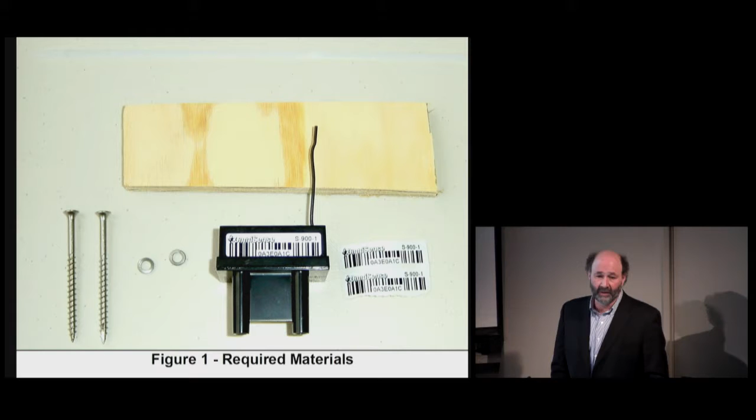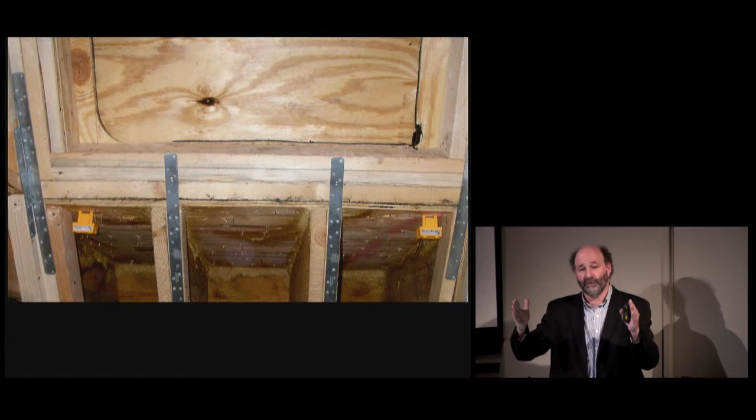It's wireless. Should last for about 5 years, which is really what I need to know as far as the functioning of the house going through all the cycles and making sure there's no problems. Because when your walls are like this thick and you have a problem, it takes you months before you find out. And by then, there's too much damage in the house. It's not a very helpful approach.

This whole system was $3,000. I mean, if you think of the risk you're taking, this is really the right approach. This is how you would install it, pretty simply.

Wonderful mason doing all the beautiful work. Amazing tapes that come from Europe that actually connect wood to steel, wood to concrete, and actually expand and contract. One of our big problems with air tightness is we pass our blower door test, but within 5 years, the tapes lose a lot of their stickiness. And so it's very, very important, if you're counting on your dew point in the wrong location, that you don't

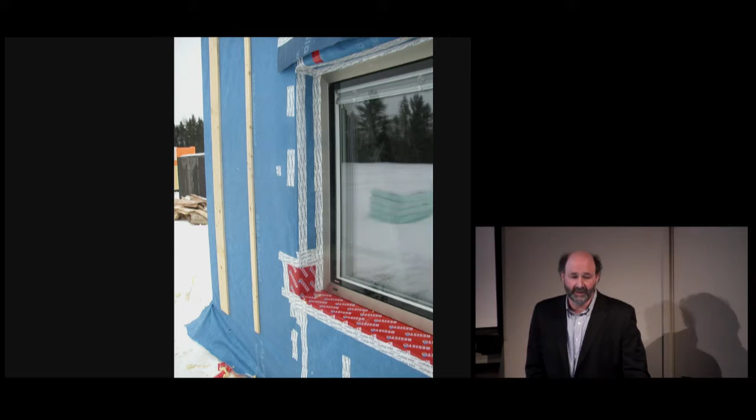take any chances. And these beautiful windows that actually are quadruple windows in a sense. The last external, which has an air pocket, actually protects the automated blind from being damaged in the wind. So it's actually quite nice. And it's just a very simple aesthetic. It took us a lot of work to let it look so simple.

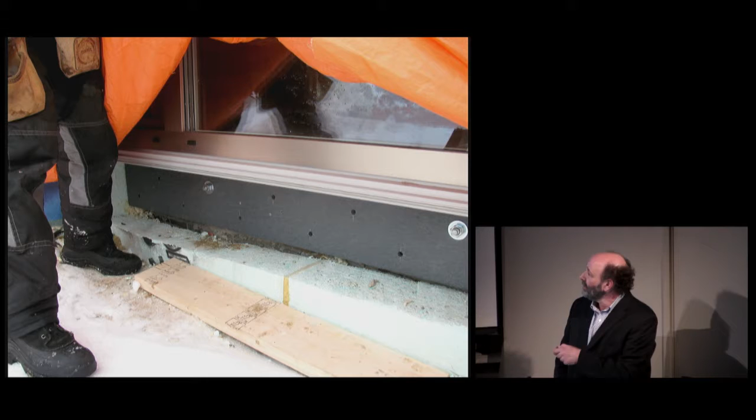And this is the way we support those doors off the foundation. It's not sitting on concrete, so there's no thermal bridging. These are these kind of laminated materials bolted to the side and this massive insulation on the outside.

And it's interesting, as heavy and as well insulated the house is, the greenhouse is built very light. And aesthetically, it wanted to play one off of the other. And I accept that this is where we're being a bit more aesthetic. It's not the perfect design. But I don't think a greenhouse needs to be perfect that way. Plants don't need the same comfort as people. And it's interesting how we're able to deal with that.

One of the kind of vegetable garden pavilions in the landscape. This is where we have the generator in case of power failures, which occur all the time. The green roof with the vegetable gardens in the background. The triple glazed greenhouse, which has the advantage of not losing so much energy, the disadvantage of losing some natural daylight, and that's where the LED lighting mixed in brings a happy marriage between the two. It's quite a beautiful experience inside there.

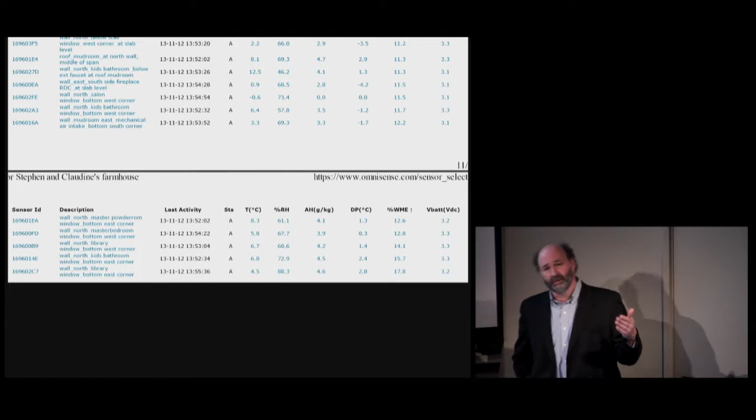So the results of the tests, if I have a lesson to tell anybody on Passivhaus in Quebec, at least in this climate, we monitored the humidity levels inside, the moisture content in the wood, throughout the construction process. And the east, south, and west walls never went past 20%, but the north wall did. And that's pretty clear, the sun energy drawing it out. And so when you cover your north wall, you better be sure that it's got its moisture out, because it's not going to dry very easily when it's so thick. So there's a certain risk factor on the north facade.

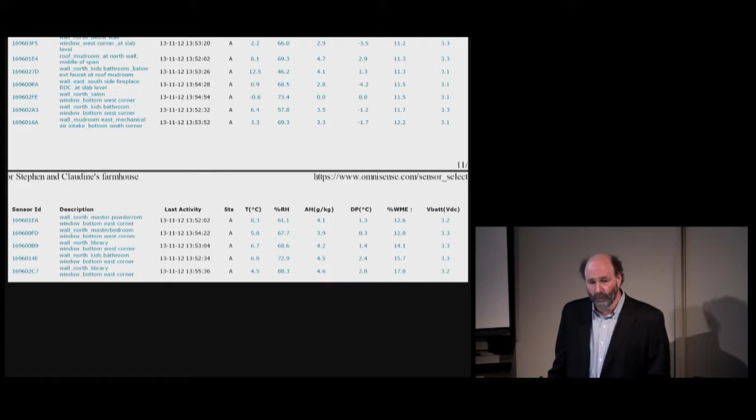Thankfully, we have fewer windows. And we made it up to about 18%, you can see here. And these are my 50 points that we keep on testing and making sure. Since we've closed the house and it's operating, they're never more than 16 or 17, even on the north side. So we have no nervousness anymore.

And then the inside, we worked with an interior designer, Cynthia Adelson, trying to respect as much as possible our modernist with the kind of barn architecture. So you have an interesting marriage here. The modernist staircase, the light just goes right across the room. The house is so thin that you really get beautiful lighting right across.

And this two-story height space over the dining room helps with the whole kind of hybrid ventilation. We have these two skylights in the center of the house and two mechanized windows in the top of the bedrooms, so we can get a beautiful natural ventilation going right through the house, and wonderful lighting coming in.

There's moments in the house that are magical where you can find little places and feel the comfort of the scale of a barn. I think it's very hard to photograph how warm the house is because it does have a modernist aesthetic, but it feels very, very warm, especially as we move up to the upper floor. Again, all of the wood is 100% recuperated, from the floors to the ceilings. A lot of beautiful artwork that the client wants to have in the house, so a lot of effort on how to light that.

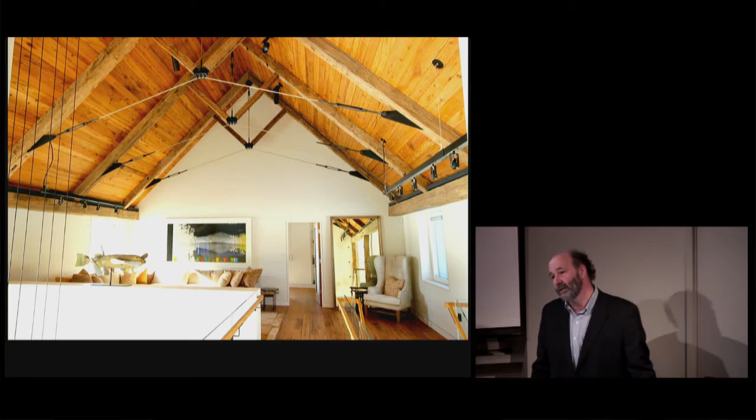So the greenhouse, I'm less nervous. It's a flat roof. It's a steel deck, green roof technology. The main house is not. It's breathable, upper level, with massive solid prefab insulation panels, but with a breathable space in between the zinc roofing and the wood strapping.

I still don't buy the passive house standard in the complexity of a multi-unit dwelling, particularly because of the integrated systems, and then the extremity of heat and cold that we face here, further complicated by the fact that it can change 35 degrees centigrade overnight.

I want to give a lot of credit to Frédéric Genest from Pageau Morel and the work that his team did to find the right balance between centralized and individual treatment. I can't say how important that is. It's such a simple solution, but no one's done it that I know of in Canada. So really how it works is there's a variable volume control that goes to every floor from the central HRV.

So in Quebec, we passed a law a couple of years ago that allows a tenant to stop getting fresh air when they don't want to be connected to the HRV. And because of that law, we came up with this mixed strategy. So it means that if someone wants to turn off their fresh air, they can. And as soon as humidity in their unit reaches a certain point, there's an override that the fresh air restarts.

And then what we did is we don't use a regular strategy for the 6 and 13-story building. Each unit is neutral. There's no negative pressure in the unit with a positive pressure corridor where all the fresh air goes from the corridor into the unit and out of the unit. But then everybody has a kitchen fan. And when that kitchen fan goes on, you can have negative pressure in the unit.